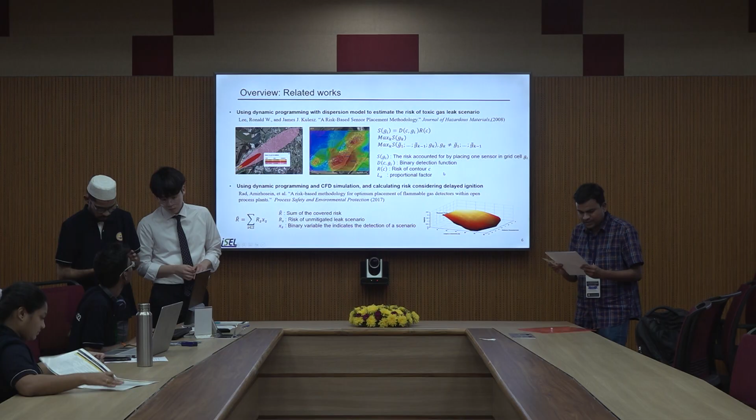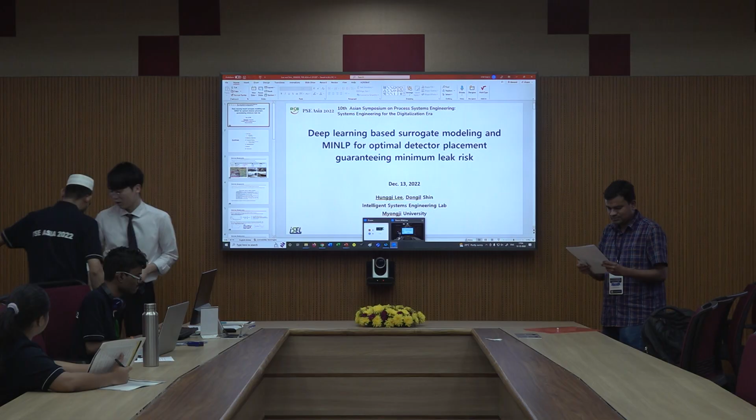Right. So, registered students of Myongji University. Today I will present the deep learning based surrogate modeling and MINLP for optimal detector placement guaranteeing minimum leak risk. First is overview, so background, and I will present the research objective. And I introduce the proposed method, detector placement optimization, and surrogate model. And next is implementation, features, and conclusion.

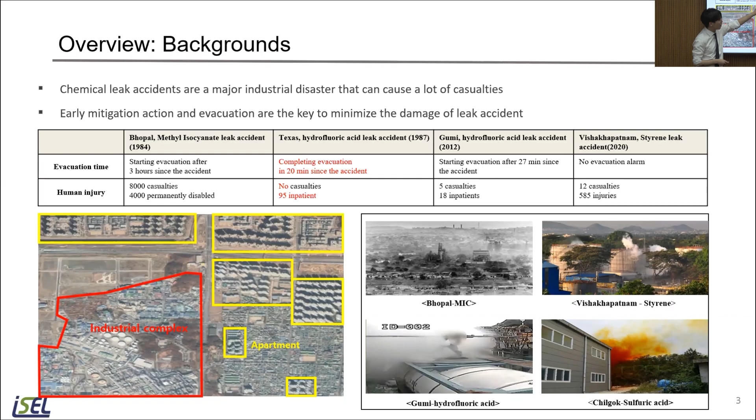First, chemical leak accidents are major industry accidents and cause a lot of casualties. As you can see in the table, the mitigation action and evacuation are the key to minimize the damage of the leak accidents. As you can see, with the minimum mitigation actions, very little injuries. So systemic response for chemical leak accidents is necessary to mitigate the damage of leak accidents. However, without damage impact assessment, detectors are installed according to simple distance-based legal standards.

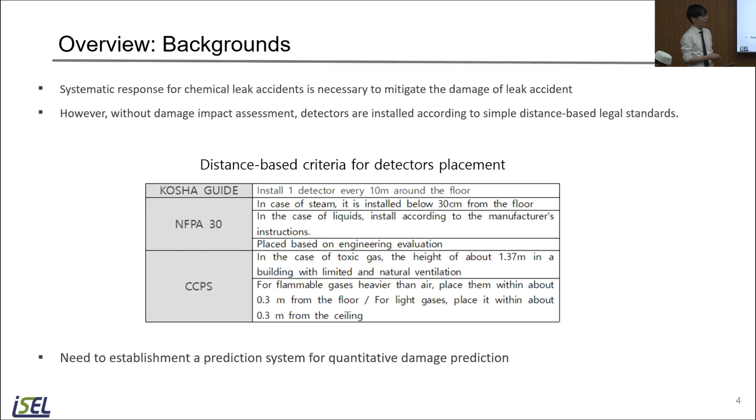Here is the distance-based criteria for detector placement for each country. The first one is in Korean. The criterion is one detector every 10 meters around the floor. And NFPA and CCPS set the criteria for detector placement based on distance. So we need to establish a prediction system for quantitative damage prediction.

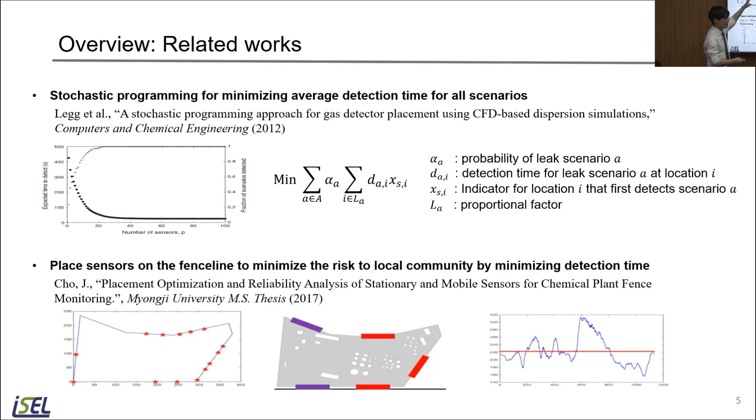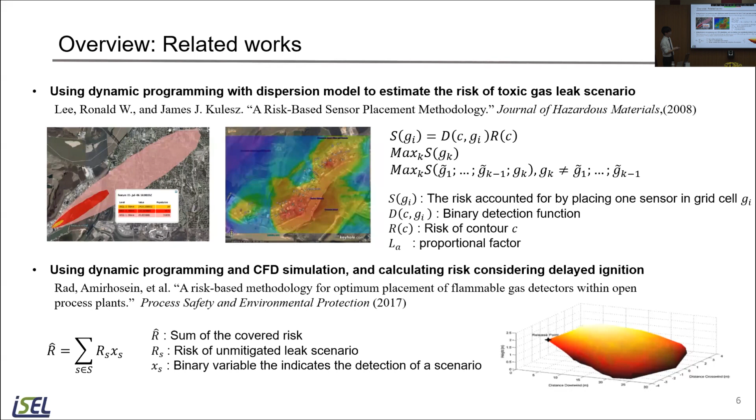They set up the sensors outside the plants. The next research sets the sensors inside the plants. Next is dynamic programming with a dispersion model to estimate the risk of toxic gas leak scenarios. They also use the simple Gaussian plume models to evaluate the risk of gas leak scenarios. And the next is dynamic programming using CFD simulation to evaluate the risk of leak scenarios.

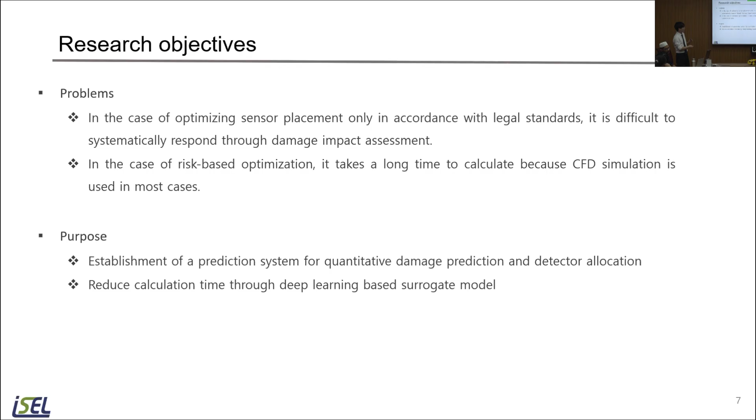So we can see the problems. In the case of optimizing the placement only in accordance with the legal standards, it is difficult to systemically respond through damage impact assessment. And in the case of risk-based optimization, it takes a long time to calculate because CFD simulation is used in most cases. So we want to establish a prediction system for quantitative assessment and reduce calculation time through a deep learning-based surrogate model.

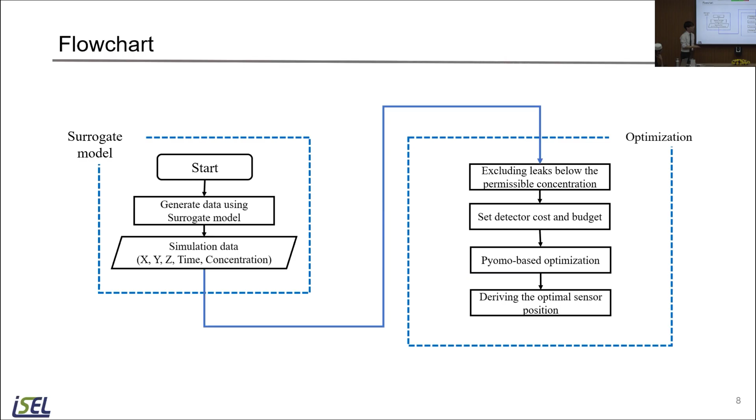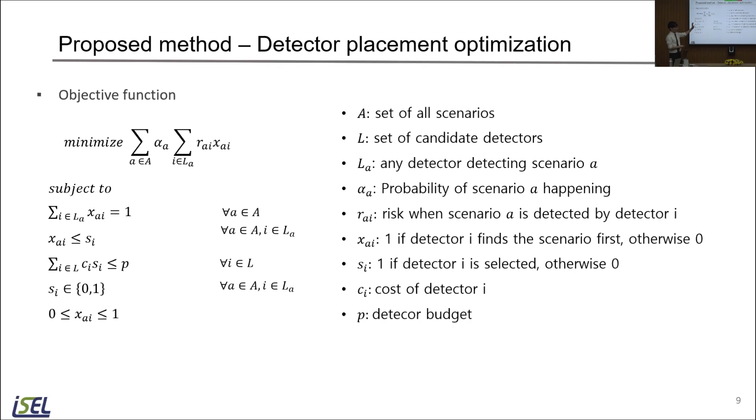Here's our objective function. Our objective function is similar to the prior research, and we want to minimize the risk score. Here R_ai means the risk when scenario a is detected by detector i. So we want to minimize the risk of the scenarios. Next, we define the risk as this. Risk is the probability of scenarios times the time when the scenario was discovered by detector i, multiplied by the damage when the scenario occurs. Currently, we set the D value the same.

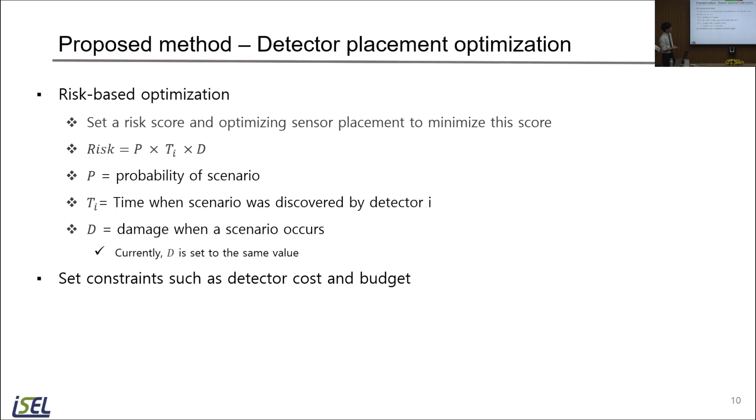So we show a sample of this framework. And also we set constraints such as detector cost and budget. And we use Pyomo as an optimization tool. Pyomo is Python-based open source software. It supports a diverse set of optimization capabilities for formulating, solving, and analyzing optimization models.

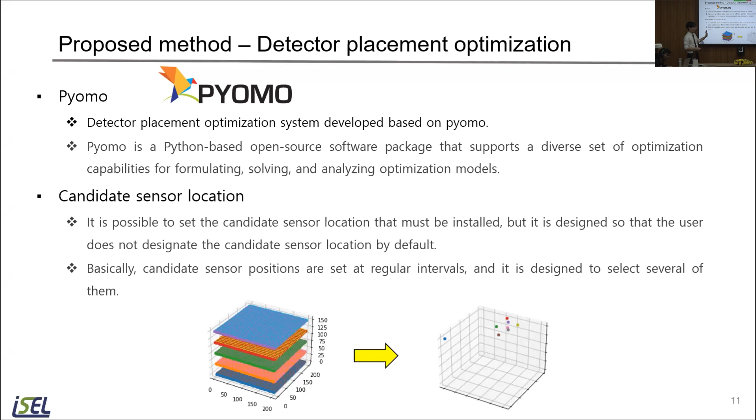And we set the candidate sensor locations. Currently, the sensor positions are set at regular intervals, so the user does not need to set the candidate positions. If the user wants to set the candidate sensor location, it can be done, but now there is no need to set candidate sensor locations.

And we use physics-based deep learning for surrogate modeling. Here is a curious question. Most physics solvers can be broken down into a sequence of vector and matrix operations, which state-of-the-art deep learning frameworks support. So why don't we just use these operators to realize physics solvers? So in this research, we use differentiable physics and neural networks.

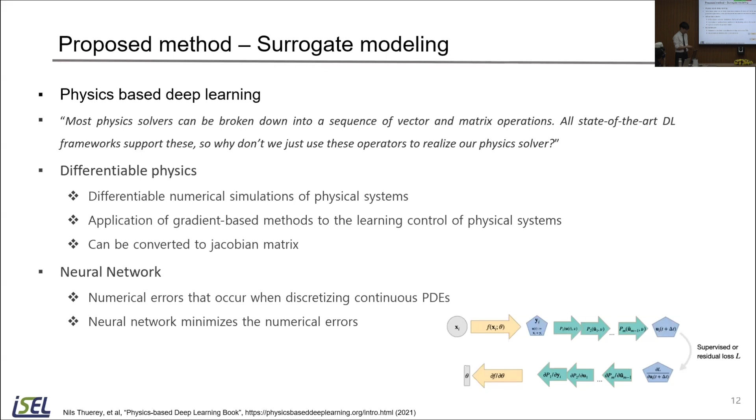Differentiable physics means the differentiable numerical simulation of physical systems and application of gradient-based methods to the learning and control of the physical system. It can also be converted to a Jacobian matrix, so it can be applied to a neural network. Numerical errors occur when discretizing continuous PDEs, and neural networks can minimize the numerical errors. So we propose a hybrid method for the surrogate model.

The PDE solver uses differentiable physics, and we add the neural network. We use PhiFlow as the PDE solver tool. PhiFlow is a fully differentiable Eulerian PDE framework, and we use the simple Boussinesq model for approximation, and also Navier-Stokes for simulation like that. We use two boundary conditions: Dirichlet for velocity and Neumann boundary for pressure.

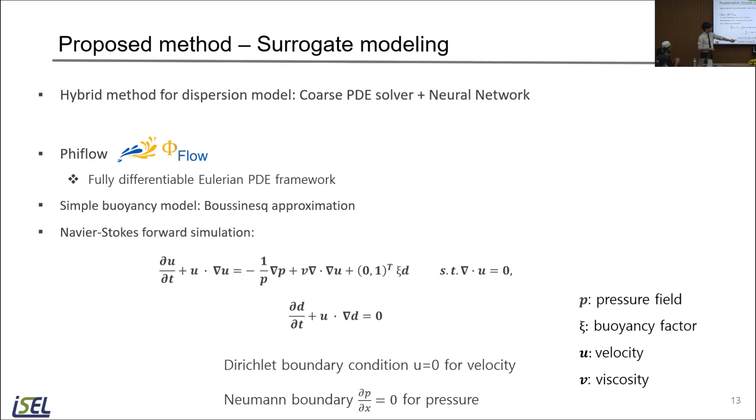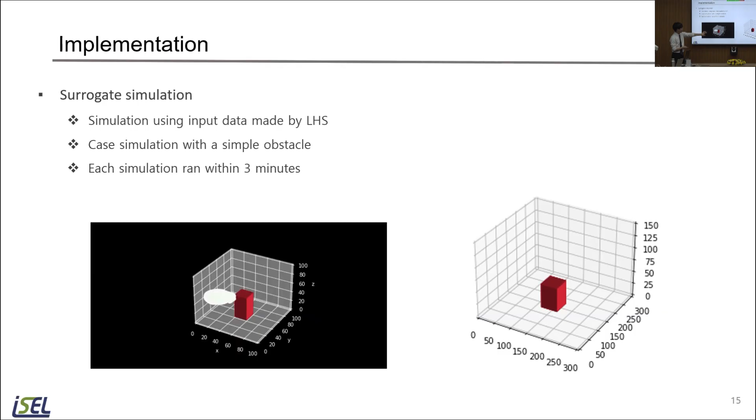And here's our simulation. Simulation using input data made by LHS, and case simulation with simple obstacles like the red boxes here. And each simulation ran within 3 minutes. You can see this video is very slow, but when the gas meets the obstacle, they do not go through. They stop. Slow down here, you can see.

And the optimization is done like that. Basically, when a scenario occurs the risk is set the same as I mentioned before. And since we used about 50 scenarios as input, we want to specify a smaller number of detectors. The detector cost is set to 5 per detector, and total budget is set to 100. So maximum detectors is 20.

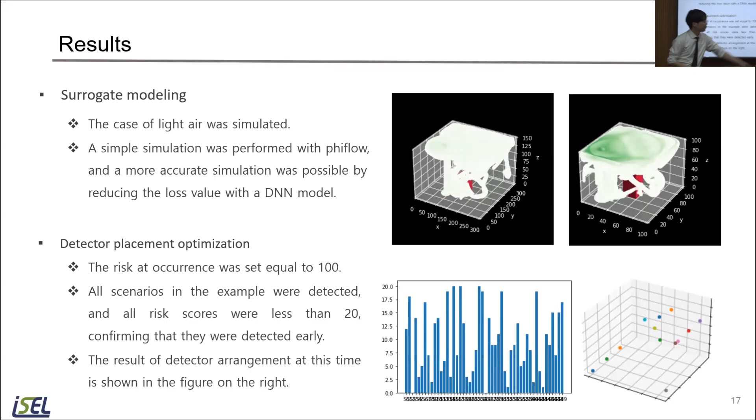Here's some conclusion and future works. A gas detector placement optimization framework using the surrogate model is proposed. The surrogate model was implemented with physics-based deep learning, and the detector placement can be optimized using the surrogate model and MINLP. Currently only simple obstacles are implemented. For the plan, a detector placement optimization framework will be developed that covers all possible scenarios while meeting the legal criteria.

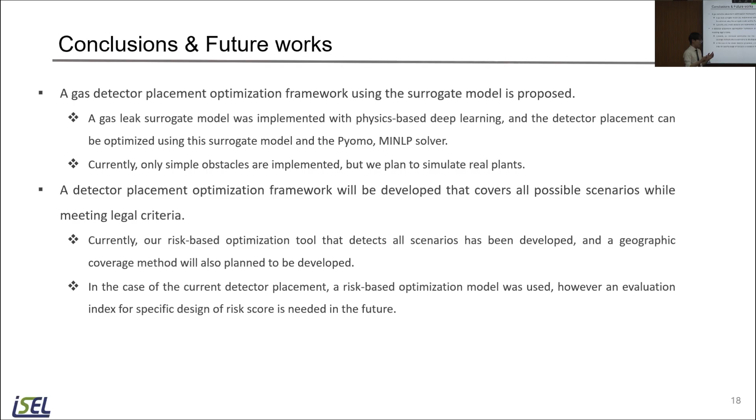In the case of current detector placement, a risk-based optimization model was used. However, an evaluation index for specific design of a risk score is needed in the future. Currently, we set the damage value all the same. We will develop the specific risk score. My presentation is

Okay, thank you. Any questions from the audience? Just to have understanding on this detector, is this the detector that you are referring to, fire detectors, or is it for toxic gases? Toxic gases detection. Toxic gases? Yes. So same for fire and gas, right?

So this simulation is to be done prior to the design, or is this something that will be done during any accident or incident? Because in reality, from the industry perspective, we have a guideline in order to do all this fire and gas mapping. They have their procedure. So I just want to understand, is this something that could be done if any incident happens, or is it something for the design?

Before the accident and after the accident, we can. So if it is something to be done prior to design, some sort of input for the design of the facility, what exactly does this simulation distinguish against the typical study that is done? And we want the F&G mapping system using this. Basically, this is for design purpose. Yeah, sorry, for design. Thank you.

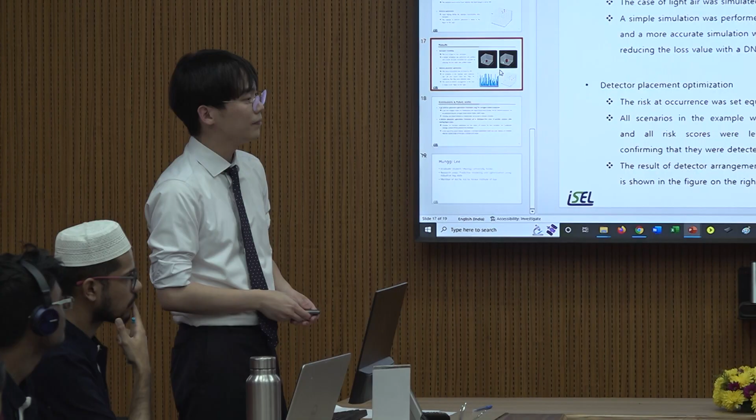I had one question in your slide. In the surrogate modeling slide, can you go to that slide? The surrogate model explanation. Further, where you explain how to generate the surrogate model initially. Yeah, this one. So here you generate data using the surrogate model or the detailed model? What is the second step? The second, yeah. This means

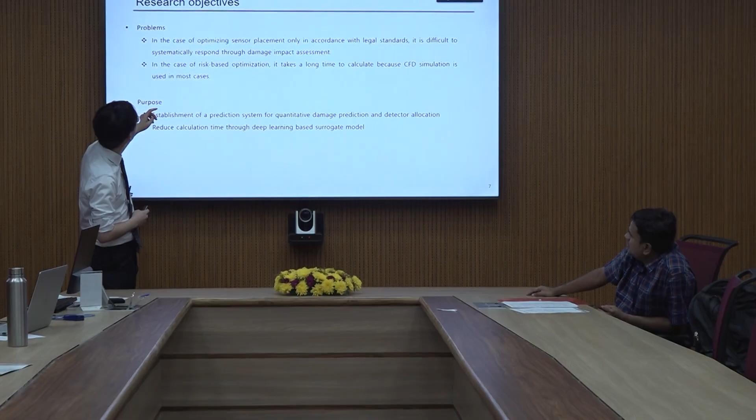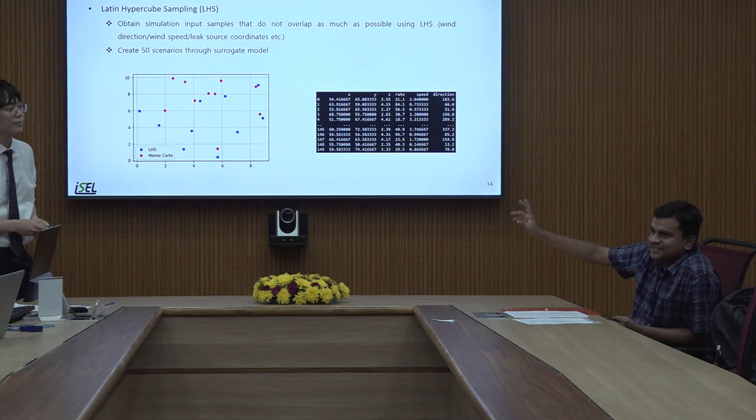But you're generating data using the detailed model, right? Not the surrogate. That's the start. So since we are using a model to get some data, do we know how accurate that is? It will be compared with a safety simulation. Now we didn't compare with some safety model. Okay, thank you for the presentation and we'll have our next.